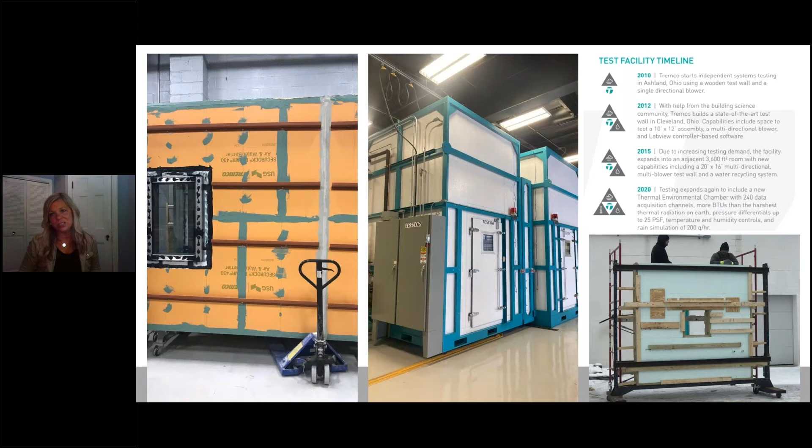We've got lots of different information that we can share as it relates to past testing, but we really want to think about those design challenges that maybe keep you up at night. Things that we can work on, collaborate together, and put a whole project team together that will include the contractor, the general contractor, the owner and the developer, and of course, the consultant. And then we can always bring in that third-party testing agency to help us validate our equipment, validate that testing.

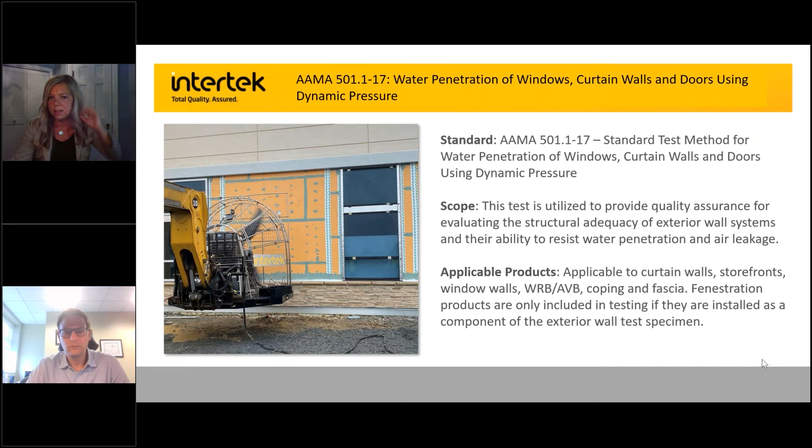Okay, so I have a couple other pictures here, so we'll just take a look at them. I know these are great different viewpoints, right? So you've got people on the outside making sure that we've got the right distance.

You've got the spray coming down, and we're on the inside taking a look at what's going on. The distance from the specimens is critical. Anytime you're watching these water tests, you want to double check that the testing agency is spacing it properly, because those nozzles are designed to deliver a certain amount of water at a certain rate, and that distance will impact that.

Another great thing about the dynamic on the inside is you can see we're right up close to the specimen. There's no chamber in the way to get in the way of our observations, so it's much easier to spot problems that way.

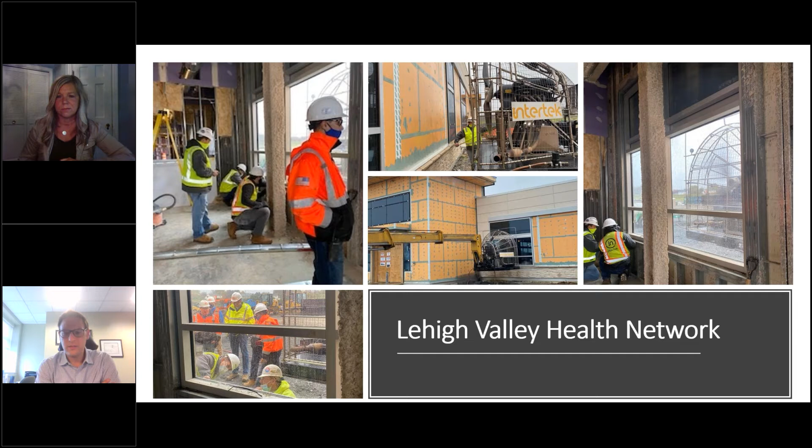We were able to look at the wall below the window and all the penetrations through the air barrier and different things, observing simultaneously. We were on the inside looking at the penetrations around the window rough opening, and of course the facade anchors.

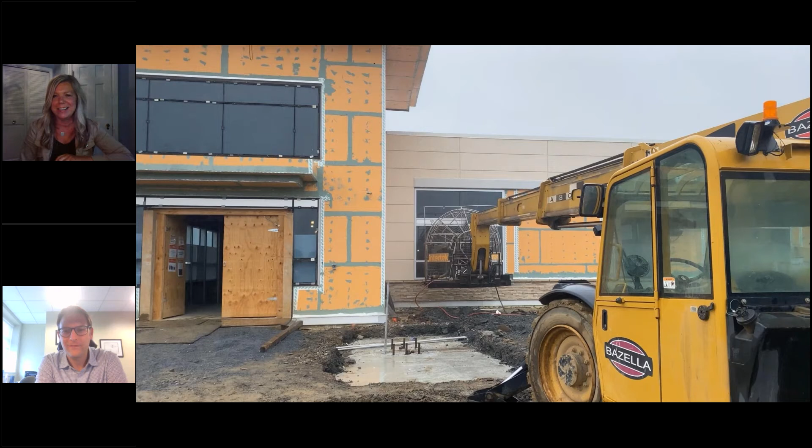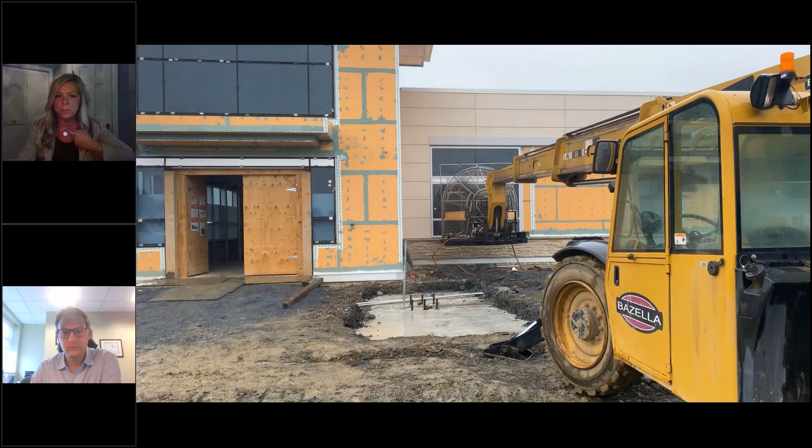I turned the sound off so no one has to hear that, and this might be a little janky here as we watch it, but it's just a quick video showing it in action, in front of the window. Then we regrouped and went over to the wall area and did the same thing.

It's always interesting trying to capture this in video. If you look at them online, the fan always seems to go much slower than it actually is in person. It's a little trick it plays on you.

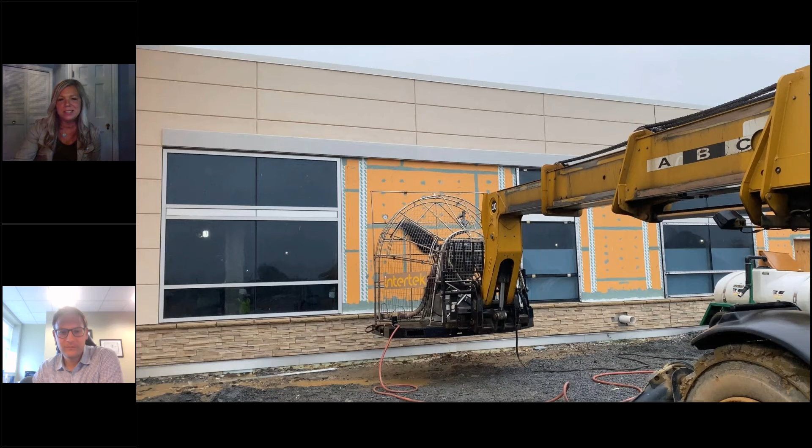This next one is a test I pulled out of our archives for one of our products that we tested at ATI. This is when we wanted to test that window to wall interface. We worked with you guys to set up the specimen. We wanted to do the water penetration test, the dynamic water penetration test, but we were also doing a structural load, where we could move that entire window assembly a certain amount of inches to show movement at the same time. This is something we did many years ago, but I found it in our archives, so it's very cool.

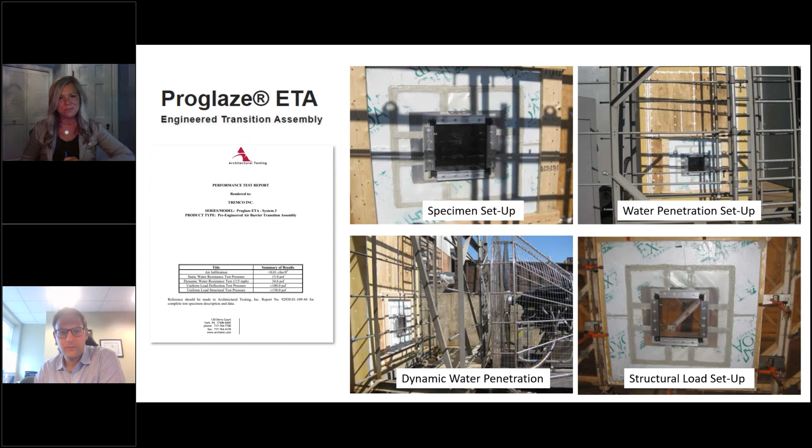Basically you spray joints around a glazing system, and you can use it for diagnostics of other parts of the building as well. You're spraying a certain area of the building, one minute per foot - that's basically the test standard. You just look on the inside for water. It's great for diagnosing perimeter joint issues.

When it comes to drainage glazing assemblies, like a curtain wall system or a storefront, this test method is not the best one to use to evaluate a glazing system in the field, other than the perimeter joint, in my opinion, because you're only spraying an area for a short period of time. You can't get those inner drainage cavities wet. So it's great for transitions between different systems on the enclosure, where you can see exactly on the inside, opposite of the joint, a clear path to where the hole is. Very good for that. We use this a lot for interface testing and different enclosure assemblies.

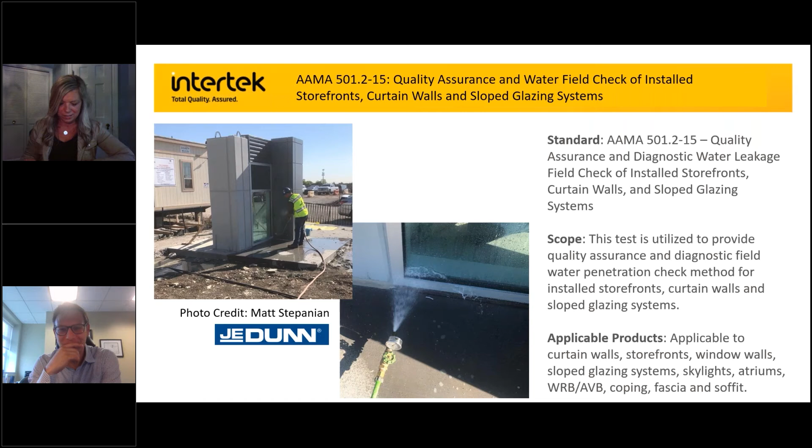Yeah, exactly. Sorry, I spoke wrong. I believe the water pressure is 30 to 35 psi. I apologize if you're fact checking. Well, that always happens, right? People love to do that. We should do a whole one where we say different things and see how many times people can correct us, because I love that people help out in real time.

And then we also wanted to go into the AAMA 502. Looking at the information you guys have, you do have a great information sheet. I guess there's been an update to this AAMA 502 from '12 to '21, so there's some great information you provided there, and I know it incorporates a couple different tests. Tell us a little more about this one.

The key to remember is that everything AAMA related is voluntary. So when you specify on a project, this is just helping the designer or project team understand how to use these test methods. AAMA 502 really just outlines how to perform ASTM E1105 and ASTM E783. ASTM E783 is a field air leakage test, and ASTM E1105 is a static water penetration test. So it just goes through the procedures, and it also discusses what the failure criteria is for the test, as far as what water leakage is.

The other big one that comes up quite a bit is the field reduction. Back to that laboratory testing we mentioned before, there's a certain pressure that every system gets tested to in a lab, and that pressure is usually higher than what it gets tested to in the field. The reason is AAMA basically decided it's reasonable to assume you could reduce the pressure in the field because of field conditions, and you're not going to get everything perfect. So there should be some expectation that you won't have the same performance as in a laboratory. It outlines how that's done and how to do the reductions, and that's basically the gist of AAMA 502 - it helps guide everyone how to use those two test standards.

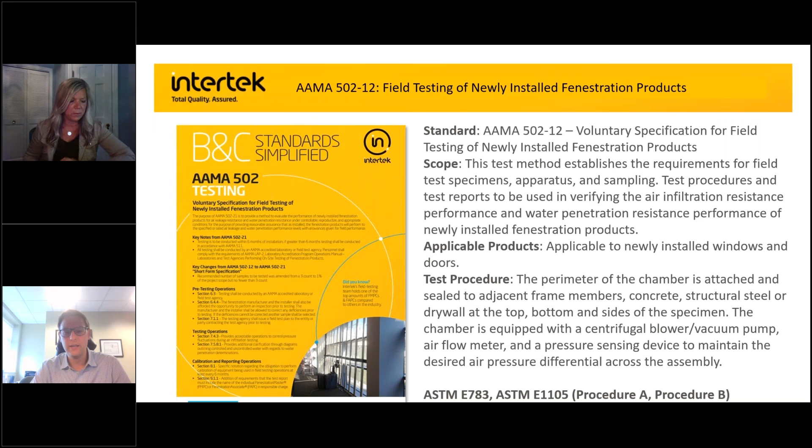I included this interface guideline that you worked on because you're on the board of directors for ABAA. I found this ABAA article you put together, and I know it includes a lot of great information about interfaces. I know you worked on this with the committee, and it includes some of that testing. Tell us a little more about this document. I appreciate you putting this in there - I know it's on the ABAA website, but I don't know how easy it is to get to, so we'll share it with everybody too.

I'm the task group chair for the transitions, terminations and flashings task group, and part of ABAA's initiative now is to really expand beyond air barriers and talk about the interfaces and how whole building air tightness is achieved and also controlling water. In my task group, we're pushing to show how the air barrier connects to all the other systems. One initiative was to start developing white papers on different glazing systems. The first one was curtain wall systems - how they're interfaced and how to make sure you're getting an air and water tight connection, and how that impacts thermal performance. The document has a general overview of what a curtain wall system is and the different types, and then how to interface it with the air barrier.